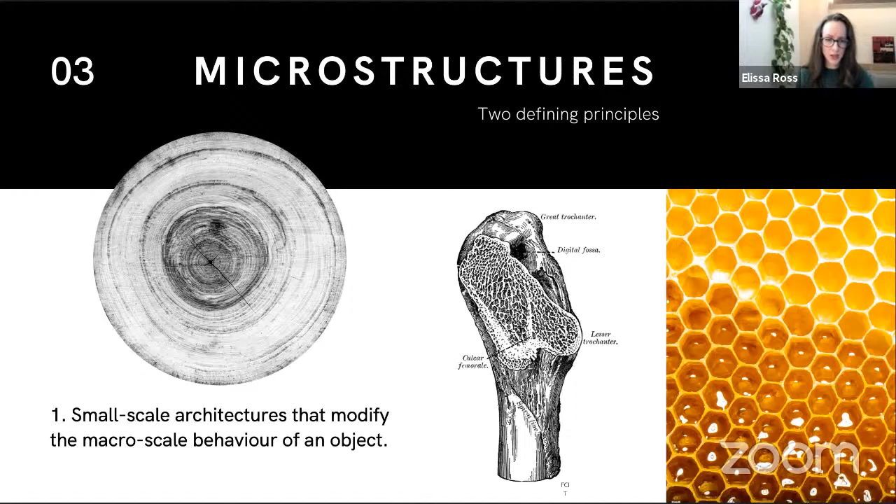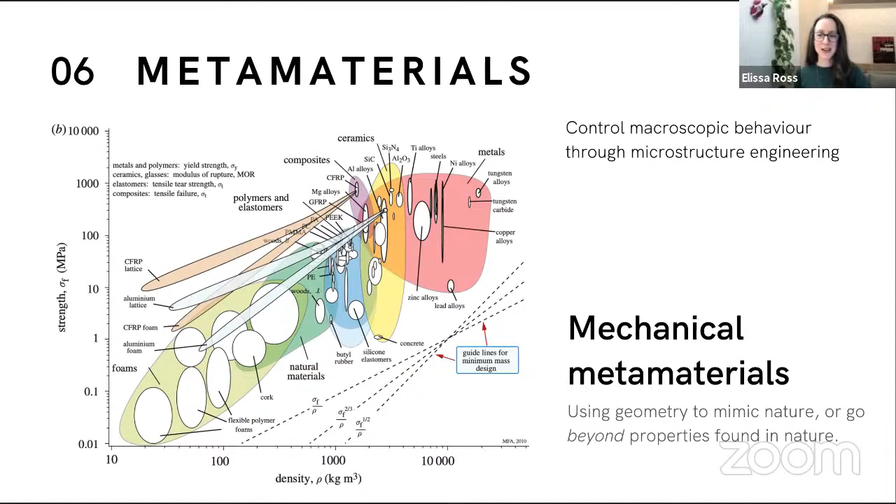That's really the idea of metamaterials, that we're using geometry - in this case, mechanical metamaterials - to mimic nature, or in many cases, go beyond properties found in nature. There are many remarkable examples of these types of materials.

Finally, we can also achieve things like these ultralight metallic lattices. So these are all examples of metamaterials, of materials that end up having properties that are really not found in nature.

There are many different forms of microstructures and metamaterials. Just to provide a bit of a taxonomy, there are maybe three categories I'll highlight: cellular or random structures - these would be open and closed cell foams, but also any kind of stochastically generated material. Then many of us are probably used to thinking about these slender beam architectures as lattices - this is sort of what I think of as a lattice.

But also recently, there's been a lot of interest in these smooth topologies, things like a triply periodic minimal surface, or even not minimal, just a level surface, or other kinds of surface or plate-based lattices. For the purposes of the rest of the talk, I'll be thinking about all of these things as lattices, as metamaterials, and as microstructures.

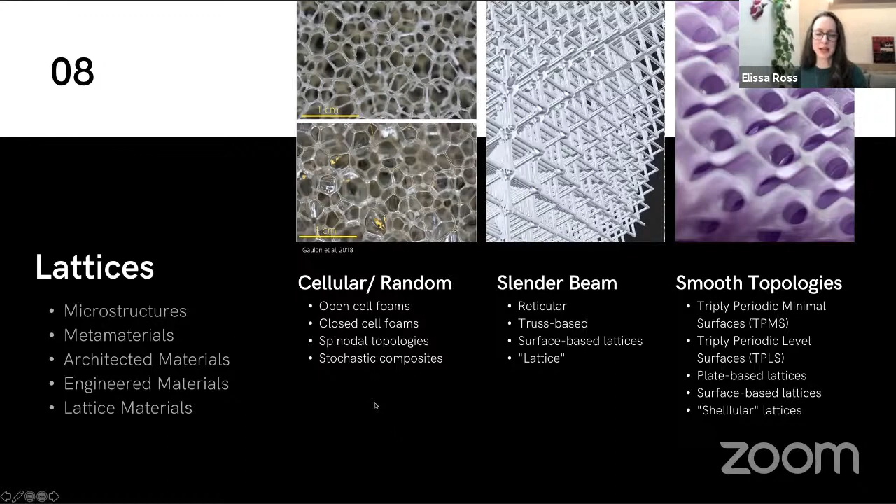This brings me to additive manufacturing, and I thought it was funny - when I went to propose my title for this talk, I first went to see if Jonàs had given his title, and indeed he had, and he had chosen 'Metamaterials for Additive Manufacturing,' which I was amused to see because the title I had selected was 'Additive Manufacturing for Metamaterials.' So I actually tacked on something about an industrial context just to differentiate.

But the point is that this highlights something I want to think about a little bit, and I'm going to call it the metamaterials paradox, which is that additive manufacturing, the existence of additive manufacturing, has really pushed forward the study of metamaterials.

And the work of Jonàs is an example of this, and there are many people doing amazing research in this field. But on the other hand, additive manufacturing has not really realized the promise of metamaterial production at scale. So many of these developments that are so remarkable and happening in the academic realm, it's hard to scale them up to a place where they would be relevant in industrial context.

And there's lots of reasons for this. First is that these can be very complex forms, possibly with very intricate detail, and almost always have very high surface area. And another central challenge is just scale, that if using traditional methods, this involves a lot of geometry processing, mesh representation, a huge amount of computation power, and there's some computational bottlenecks involved.

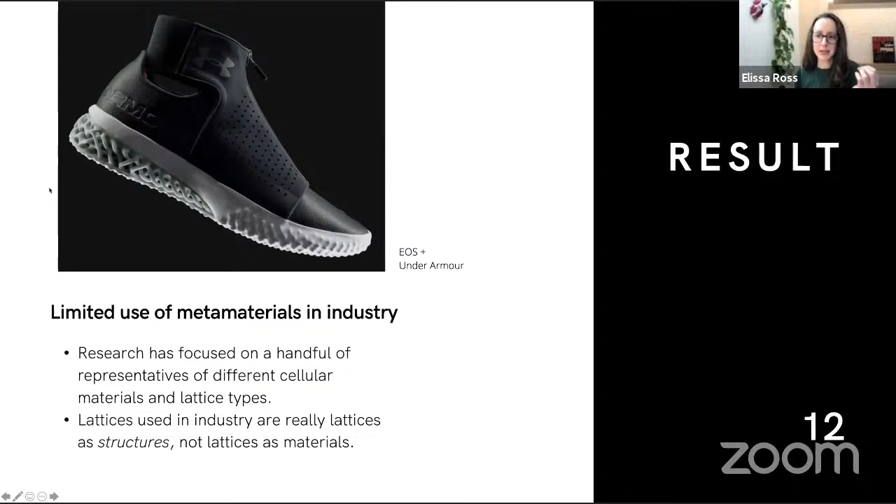And I don't mean to diminish these efforts, because I think they're really important and really cool and they have their own value. But the point that I want to make is that this isn't really metamaterials or microstructures in the way that I've defined it. So in other words, the lattices that are used in industry are really lattices as structures, not lattices as materials.

Which brings me to Metafold. And we are trying to address this issue by creating new software and hardware intended to print lattice materials. So we're really trying to realize that length scale separation.

We printed it at a very fine scale, and we're able to achieve this very unusual optical effect, which is that the gyroid actually seems like a solid. It feels like a solid mass, almost like a material, but then it has this optical property, which is very curious. It's almost invisible in certain light conditions.

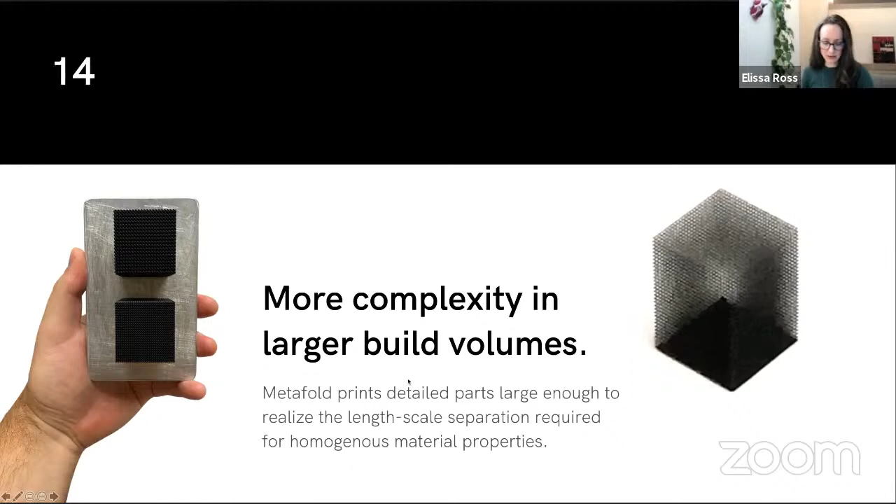In terms of our technical approach, I won't really say too much about this here. It's a DLP-based printer - this means that we're using light to cure liquid resin. But the critical thing is that we've developed both software and hardware that interface together that allow us to print higher complexity and larger forms than other methodologies.

And the kind of idea is that we only generate the geometry that we need at print time. We don't need to pre-compute the kind of closed form geometry all at once in advance and then do some computation on it. We just compute what we need at print time, and it's this feedback, this closed loop between the software and the hardware that allows us to print higher complexity and larger forms.

In terms of our development status, we built our first prototype about a year ago now. That was intended to prove out our complexity hypothesis. And we actually formally launched the company a few months ago after submitting some patent applications. And now we're working to prove out the scale hypothesis, which is that we can scale this up in a very dramatic way.

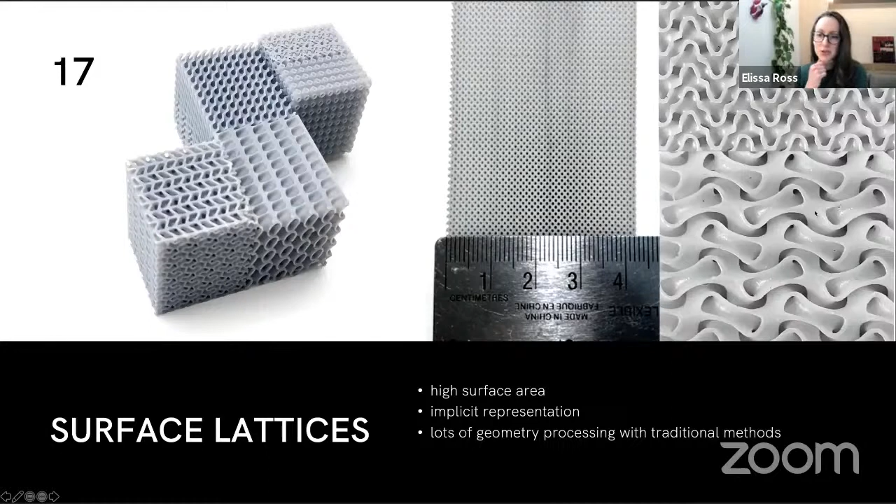So we've been able to print some more unusual surface lattices that we're not often seeing in the research.

We have been exploring and having fun printing these hierarchical lattices. These, again, have really interesting structural properties - they can be very light, yet very rigid because of the interplay between the macro and micro lattice. And these are very difficult to generate in standard CAD tools, which is why it's great that we've been able to just print them using our tool. And they have, again, very high surface area, which is what makes them very challenging.

We have done some work printing more stochastically generated things. This was a nice paper out of ETH, where the authors developed an inverse machine learning model. It takes in a stiffness matrix of your desired performance characteristics, and then outputs the design parameters that provide a geometric prescription to achieve that particular response.

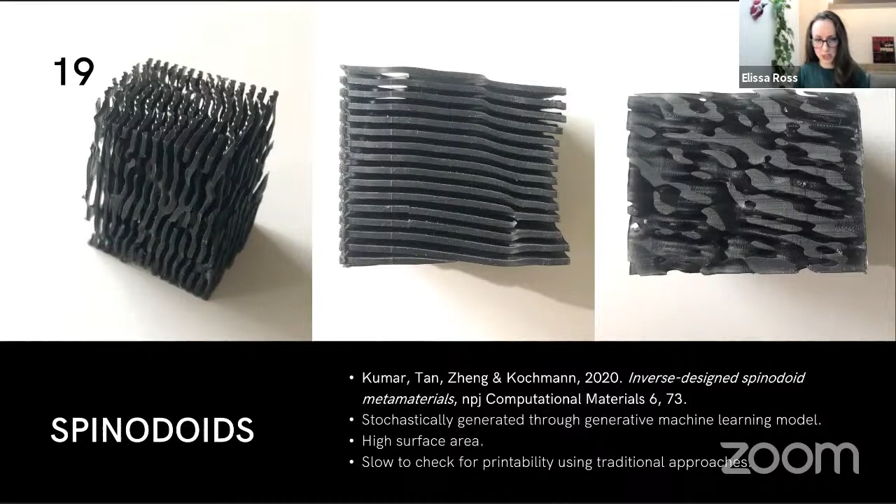These forms would be challenging in standard workflows because they're implicitly defined. We were able to effectively implement the algorithm that the authors defined for their generation, and we can just directly print them.

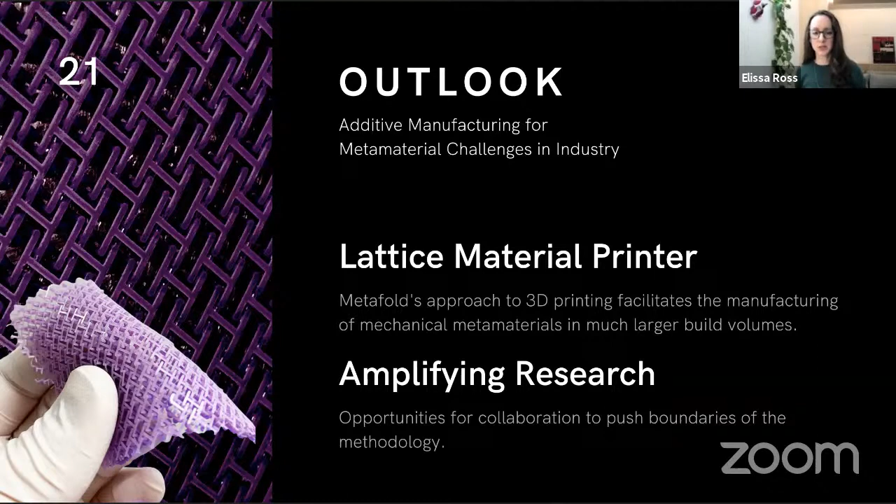So to conclude, additive manufacturing for metamaterial challenges: we're really excited about the idea of creating a real option for a printer that will print lattice materials, not just lattice structures. We're also excited about amplifying and bridging the amazing research being done on metamaterials and microstructures, and translating that into industrial contexts.

And of course, it's very much a team effort. I should say also that Metafold is a spin-off of Mesh Consultants, which is a Toronto-based geometry consultancy. And that's where I'll leave it.

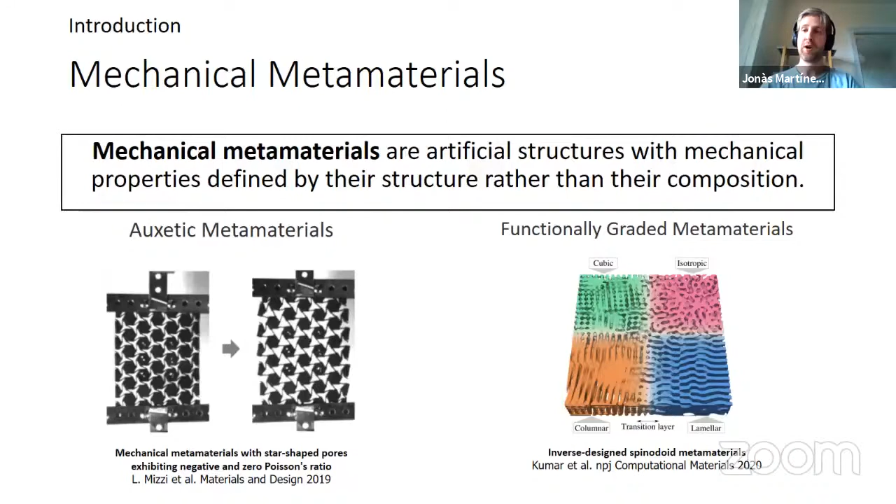So again, this is a kind of repetition, with different applications. One of the most well-known is auxetic metamaterials, for instance designing materials that expand when you do tensile stretching, which is counterintuitive. I also had a look at this recent paper, which is very nice, on functionally graded materials using spinodoid metamaterials. Here you have an example of a stochastic material where you have different types of material properties. This is actually one of the parts we're most interested in: creating metamaterials that exhibit a wide range of properties while being able to print them.

This is another application that we've played with lately, and this is actually a publication of ours in collaboration with scientists in soft robotics. Here, metamaterials can be interesting, for instance, to obtain deformations of a robot that are more interesting than the ones that you get with traditional materials.

This is one application among a lot, because there's a plethora of them. But for instance, you can also do other things with metamaterials, such as shape morphing metamaterials that exhibit some interesting behaviors when you compress them, and so on.

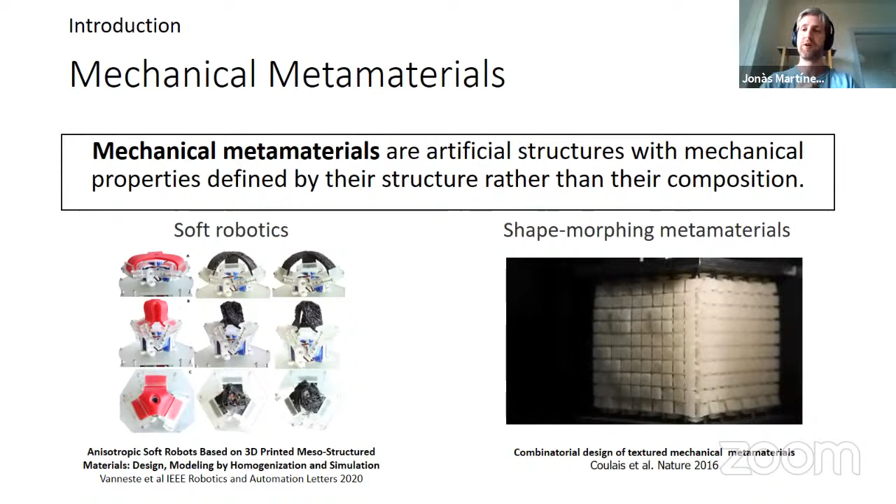So as you can see, there's a lot of possibilities, a lot of fields of application where metamaterials show great promise. This is in particular because currently with additive manufacturing we can manufacture such structures, at least in the mesoscale. Here you have an example of one of the structures that's been printed with a regular Ultimaker using fused filament fabrication.

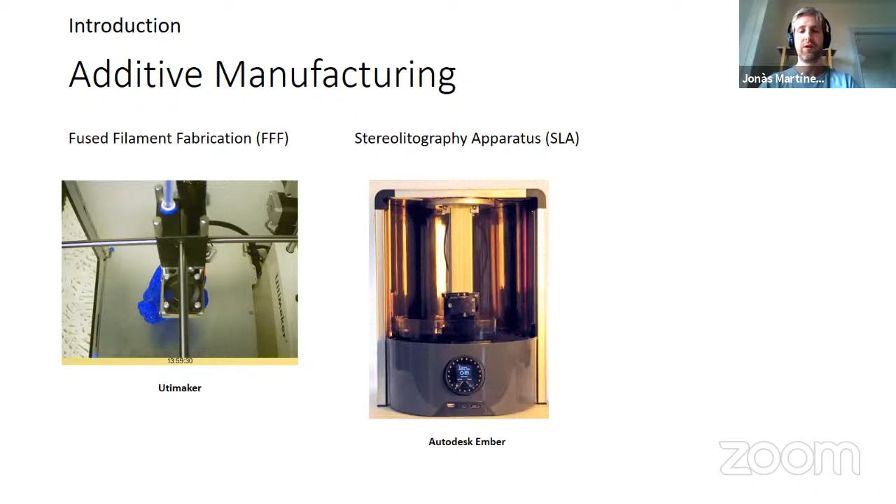But of course there are other technologies available, such as stereolithography apparatus, which proceeds layer by layer through solidification, or for instance selective laser sintering.

I want to show these different techniques because when we are dealing with metamaterials, we should never forget that at the end they are going to be printed, and this means that we have to take into account the fabrication constraints that they impose.

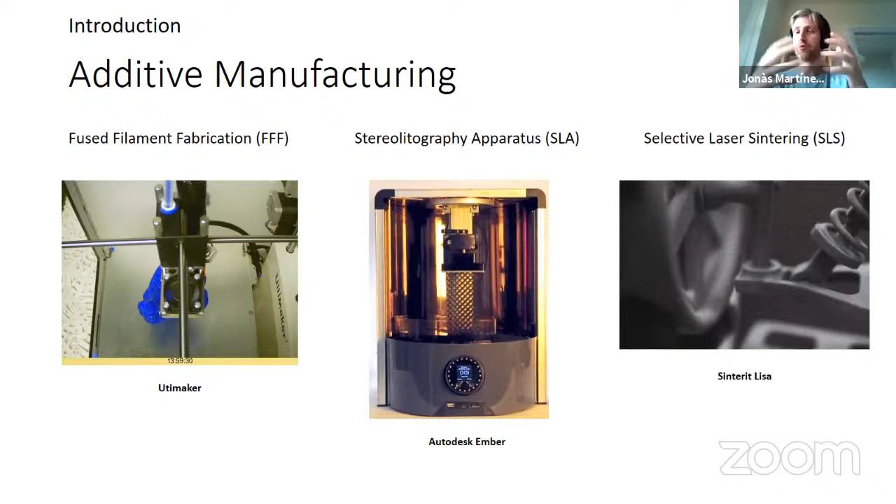For instance, for fused filament fabrication, you need things that are self-supported, because due to gravity they will fall unless you put supports. For stereolithography apparatus, you need structures that are single connected components, and so on. So you have to take these into account when you design your metamaterials.

So there are two different classes of metamaterials. I'm going to focus on the two that are most widespread. The first one, one of the most used, is periodic metamaterials, which are defined basically by a representative volume element, usually a cubical periodic element that is repeated through space.

The advantage is that they can be very efficiently simulated, and the storage is very compact. So you can simulate with periodic homogenization, as Elissa mentioned, the behavior of this kind of microstructure in the limit.

But on the other side, there are some challenges being tackled by researchers now, which is when you have different families of periodic metamaterials that exhibit different topologies, and you want to do a continuous gradation between them, you have to take into account the transition between them.

This is a bit of a repetition, but I'm going to briefly pass on this. So what is periodic homogenization? Basically, you consider that you have a representative volume element that characterizes your microstructure.

And then you consider that the size of this representative volume element goes towards zero, and then you consider the homogeneous material that you will get, and you get the average properties of this material. There are several numerical tools to do that.

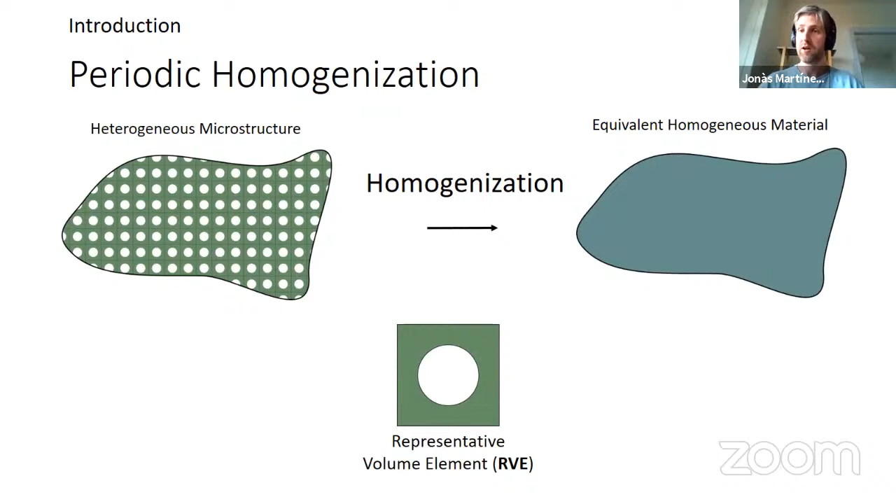One of the cons of stochastic metamaterials compared to periodic ones is that, for instance, the homogenization becomes more costly. I will explain that later, it's more involved. But one of the big advantages is that you can do grading in an implicit way.

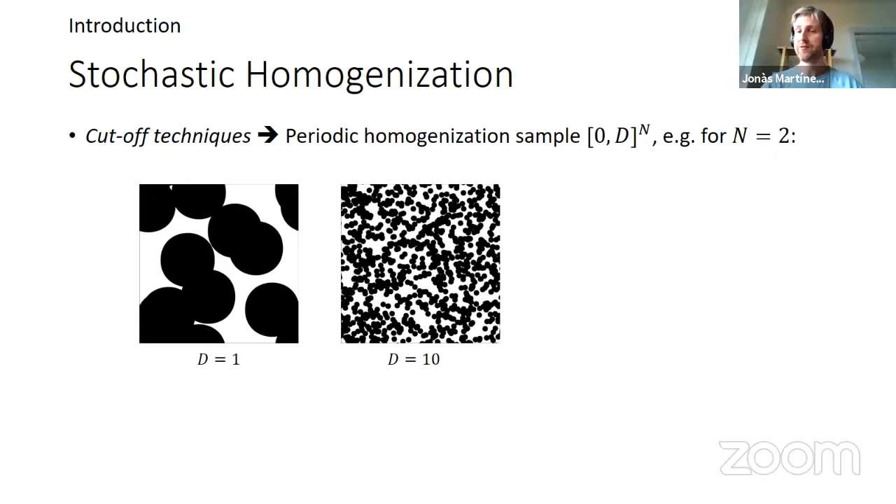So how do we compute the average behavior of a stochastic material? That's actually a pretty involved question. Usually what we consider is the so-called cut-off techniques, where we take basically a representative sample of our random media, and then we try to find what is the size that gives us a good approximation. Here you can see basically these are points randomly sampled on a space.

The interesting thing is that actually it's been proved that when the size of this cut goes to infinity, it converges to a stable behavior.

Coming from computer graphics, initially we draw our inspiration from something that was really old, which is procedural solids. You can see here an example from SIGGRAPH in 1989, hypertexture. What's going on is basically that you have a procedural definition of your solid. So basically, for each point in space, you have some lines of code that are going to tell you if it's either solid or it's empty. It's as simple as that.

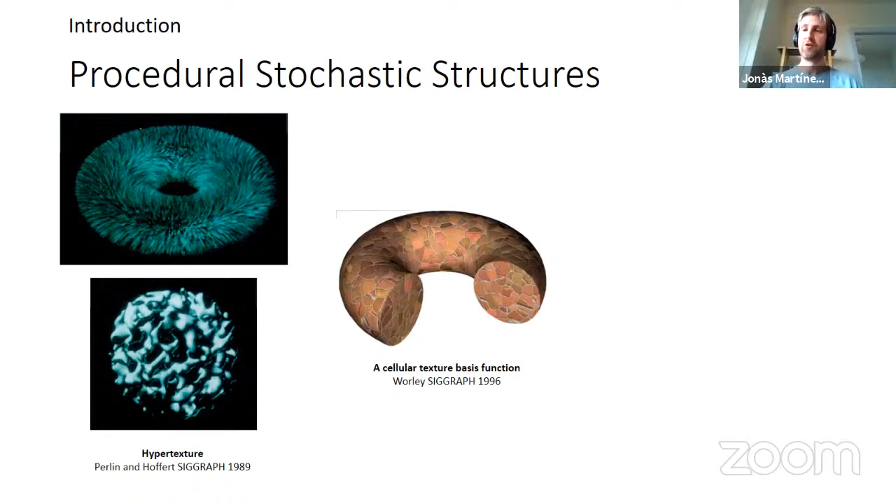As you can see, it's very compact. It doesn't involve having a mesh, and it's amenable to scale with microstructures and fabrication. Here you have another example, and if you want to have a look, you can find a lot of them on Shader Toy, procedural solids.

So here's the pipeline that we will follow in all the next results I'm going to show. Just to recall from the beginning: we have some object that we're going to fill with a microstructure in the interior. And then at some point we want to print the slice. So what we're going to do is call our procedural code to fill the interior of this slice with a microstructure.

Basically, we never generate meshes in our approaches. People keep asking us for a mesh, but it's difficult for us to provide them because we don't generate the mesh — we generate directly the instructions for printing. It can be in the form of G-code or, for instance, an image for stereolithography, but we never explicitly store a mesh.

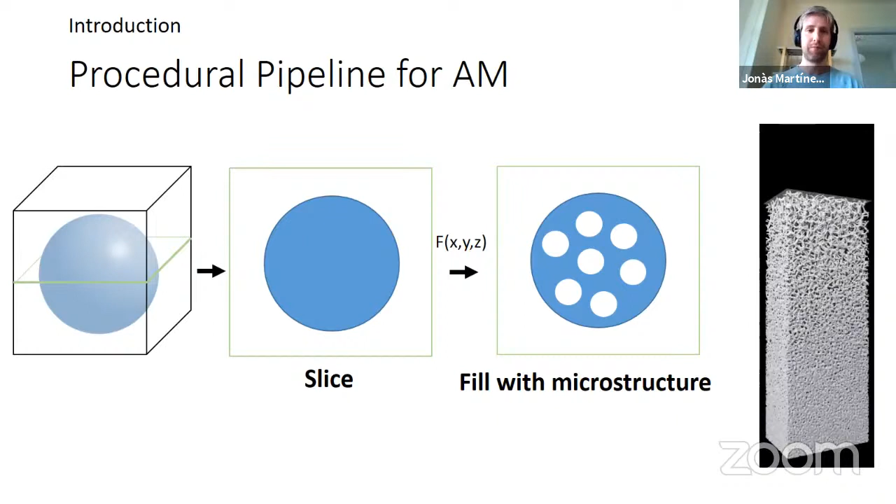Before continuing with my presentation, I'm going to give a brief explanation of two types of elasticity that we consider. The first one is isotropic elasticity — this is the most simple. Imagine that you have some body, and then you apply some force over it.

And the force is applied to some area A, so we call the stress the force divided by the area. Then, of course, this force is going to cause some deformation, and the ratio of this deformation and the total length is called strain. This is a relative measure. We denote by Young's modulus the ratio between the stress and the strain.

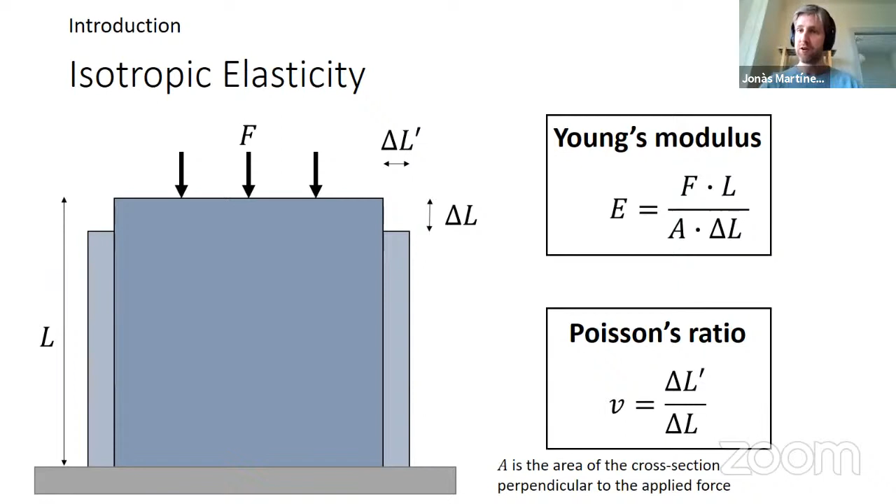This is given by this formula, and the Poisson's ratio is the ratio between the lateral strain and the vertical one, so it's a dimensionless number. An isotropic material is one that is entirely defined by these two constants. Intuitively speaking, this means that regardless of where you do the compression or extension to your material, it's characterized by these two numbers.

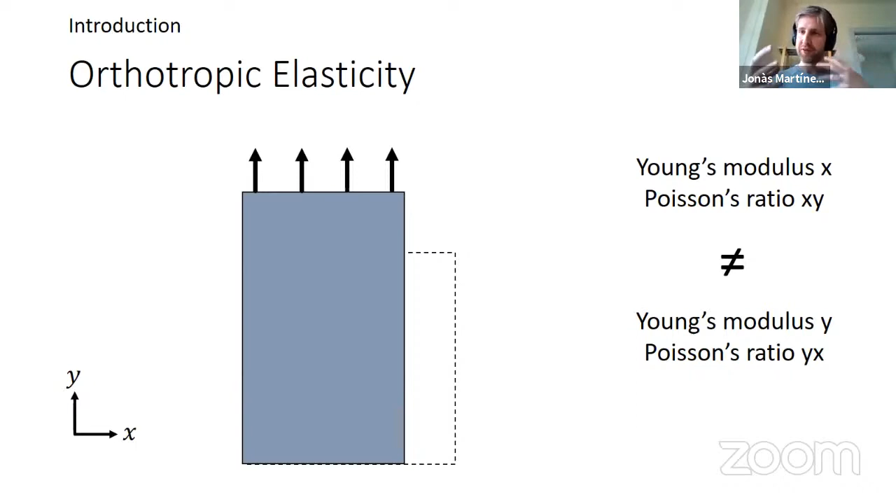Another kind of materials that we consider are orthotropic ones. These are defined by more variables — I'm going to give a very brief explanation. Basically, we have an orthogonal frame, XY here. If we apply a force in one direction, we get some Young's modulus and Poisson's ratio. If we apply the same force in another direction, we get a different Young's modulus and a different Poisson's ratio. So basically, these are materials that have independent orthogonal Young's modulus, Poisson's ratio, and shear modulus, which I won't go into detail on, but gives a notion of what an orthotropic material means.

Because we never try to forget that at the end we want to print that, we have to take into account these fabrication constraints. So let's dive first into the first work. What we wanted to do is basically an isotropic material that we could print with an Autodesk Ember, which is this kind of stereolithography machine.

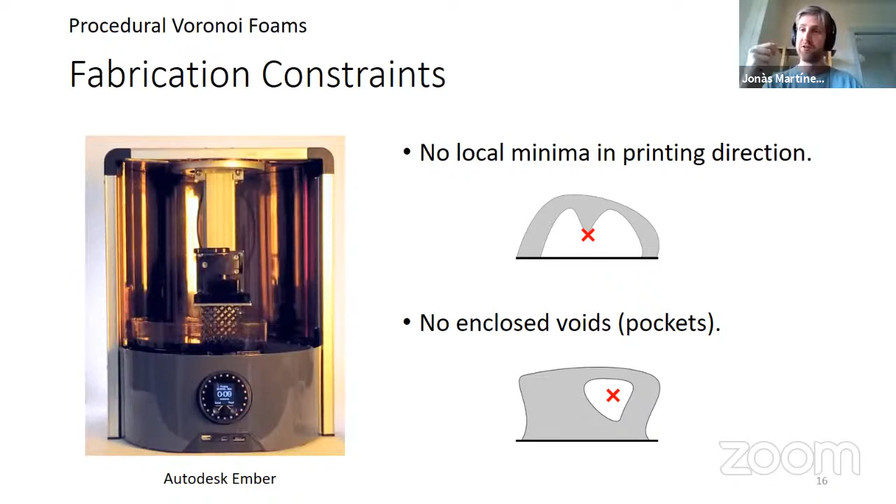The fabrication constraints here are basically that you need to have no local minima in the printing direction, so basically you cannot have this kind of islands. Also, you cannot have enclosed voids because they will trap the resin in the interior, and that's something you want to avoid.

So we figured out that having convex cells, a cellular structure with convex cells, is good because you guarantee that you don't have local minima. And in particular, an open cell structure doesn't have enclosed voids. So just taking the edges of a 3D Voronoi diagram seemed promising.

We dived a little bit more, and we saw that there were already several studies on Voronoi microstructures. It's interesting because when you consider a small piece of the space, it's been shown that the randomness helps to get a better isotropy for a finite extent. Also, we got interested because the Young modulus is correlated directly with the relative volume. However, the Poisson's ratio remains quite stable and positive.

So how do we compute this in a procedural fashion? Basically, we have some input density field given by the user that indicates some density distribution of the seeds. And then you have some point Q, and you want to determine whether it's solid or void.

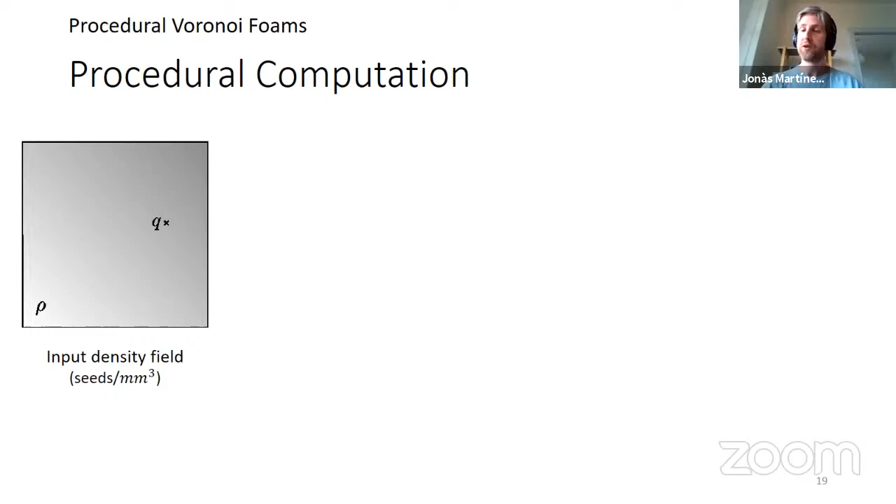So what we do is recursive gathering of seeds around this point, the seeds of the Voronoi diagram. And we compute some local bisectors, like the local one on the point Q. And then we can determine if the point belongs to a Voronoi edge or not. We do that without ever explicitly storing the seeds or any mesh. It comes in a procedural form.

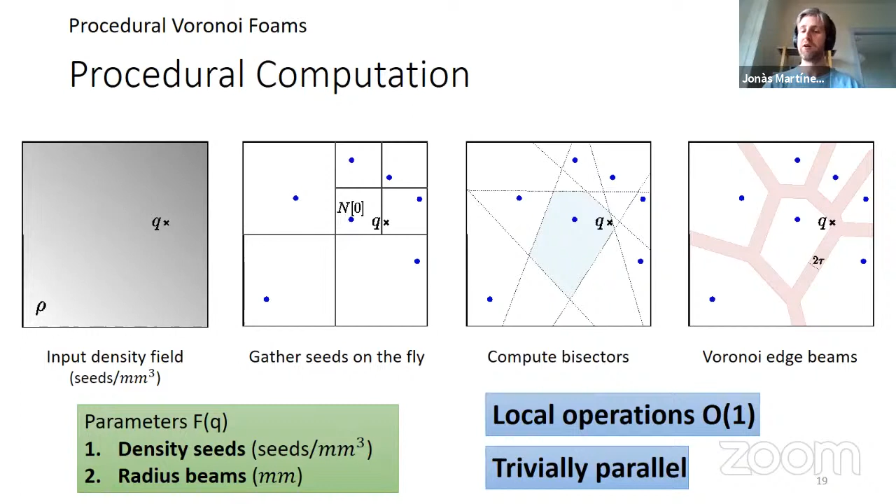So basically we have two parameters: the first is the density of the seeds, and the second is the radius of the beams. And all these operations are trivially parallel and run in constant time. You can find 2D implementations of these already in Shadertoy. However, the 3D case was not straightforward, and we had to deal with some more complex cases, but there are also implementations available.

And finally, we also did some numerical homogenization to verify that our results corresponded to what's known in the literature. So regarding the Young modulus, as you can see here, you have the volume and the Young modulus. It correlates in a quasi-quadratic fashion, so you can encode this even with some polynomial formula.

And the Poisson's ratio, for instance here the base Poisson ratio was 0.3. As you can see, it stays pretty stable around 0.3 and goes up to the limit of 0.5 for very low densities.

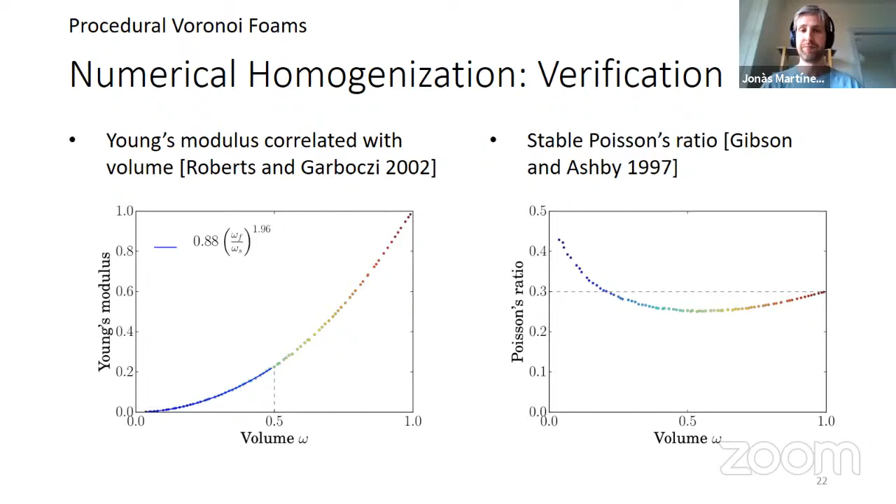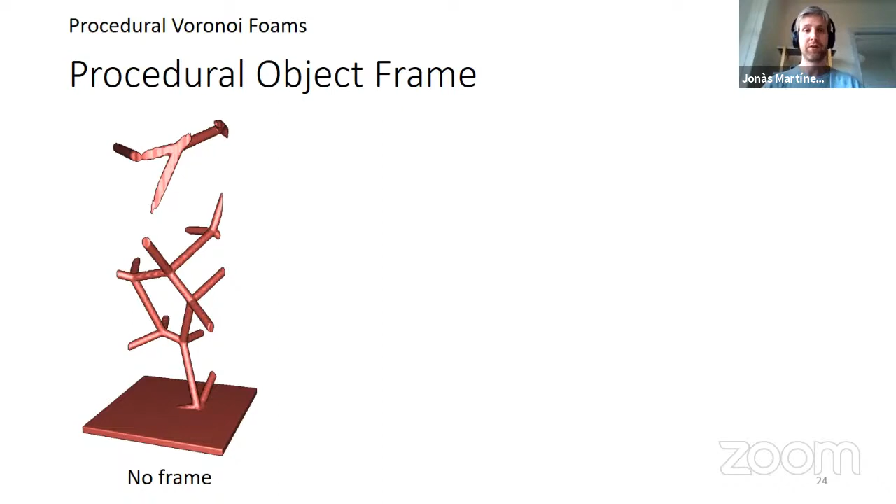Finally, something that we do also in most of the works based on cellular materials is a nice trick: we can do a procedural frame as well. So if we consider the intersection with the Voronoi faces, we get this - this is a cylinder. And if we improve it, taking into account the normal, we can smooth it and get an even better approach. So we can do the frame of the structure also in a procedural fashion.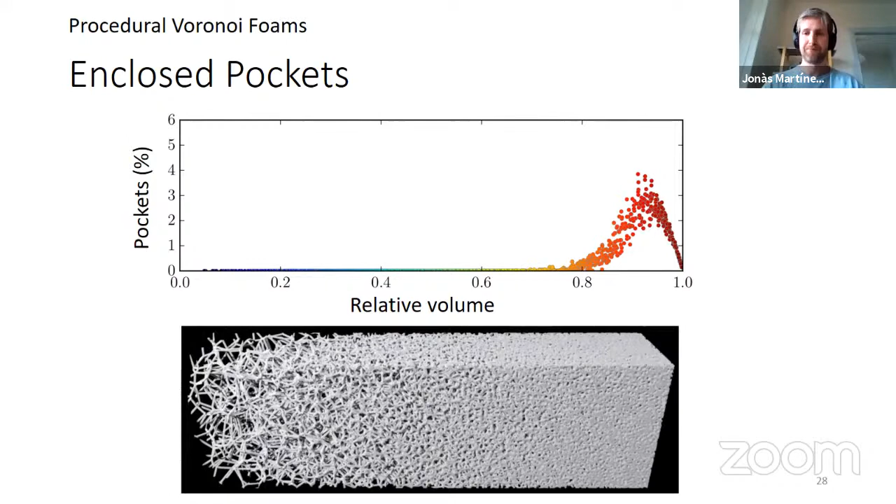So now let's go for the second class of metamaterials that we developed. In this one, we wanted to do an orthotropic material. This resembles a little bit the slide from Elissa showing the wood, because what we wanted to do is a material where we can change locally the local frame of orthotropy - basically something where we can define how stiff it is in one direction and how stiff in the other orthogonal direction.

This is because, of course, if you enlarge the space of materials, you can adapt directionally to the loading scenarios, and you can devise better designs.

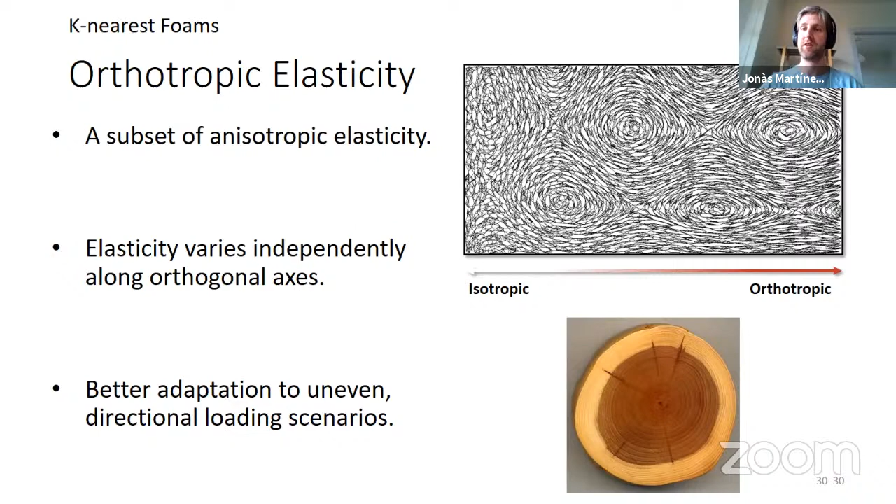So our first try was to take the Voronoi diagrams and just stretch it. If you do that, that's actually okay, but of course this is quite difficult to compute when you lift to 3D dimensions, because either you do an inverse mapping or you compute Voronoi anisotropic diagrams, which are difficult to compute procedurally.

Then we thought about doing an anisotropic point sampling, but actually it doesn't induce any orthotropy. We even tried to vary the Voronoi edges following some direction, but it didn't work.

So we wanted to take another approach, and we thought about getting inspiration from this kind of laminate-like materials. I'm going to show you truss materials that follow a laminate structure.

What we did is consider basically a k-nearest graph of a set of points. Basically, you have an input point distribution, and your k-nearest graph, for each point, you're going to link it to the k-nearest closest points. For instance, you can have k equals 6, and you link it to the 6 nearest points. You can do that considering some metric.

In our case, we consider a distorted metric, basically the Euclidean one with some affine deformation. As you can see, we have two parameters: one is the angle of this metric, and the other is the stretching factor. Finally, we also have the beam thickness parameter.

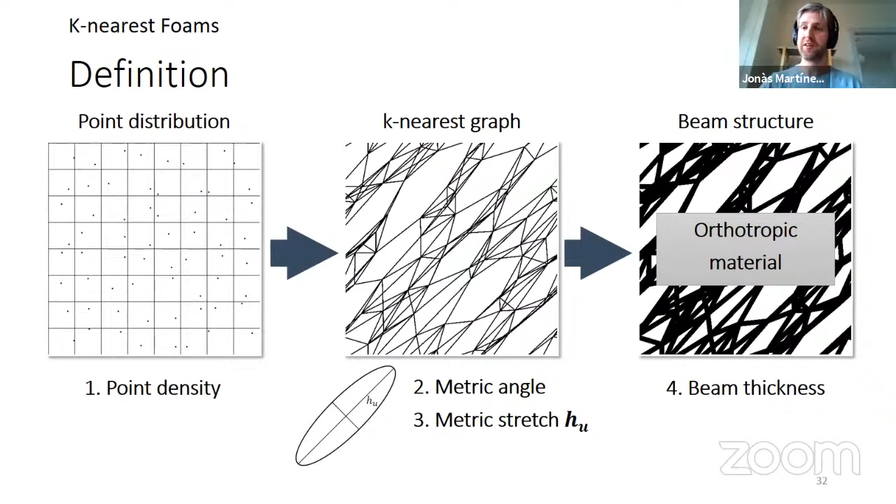And we found that this gives actually an orthotropic material that spans a pretty wide space. I'm going to enter in more details about that later.

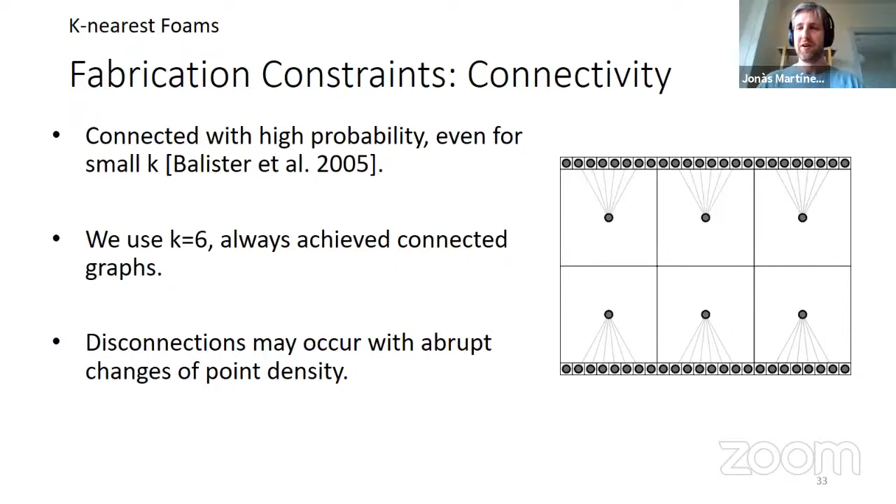That's interesting. There's been a lot of studies on what is the number K that guarantees almost that your network is connected, because of course if K is very small, you can have networks that are non-connected. So for K greater than 6 or 7, it's been proved that it's almost impossible to have a disconnected network. But I can show you a counterexample, nicely fabricated, where you get a disconnection. This is highly unlikely, and we never encountered it.

Another thing that is nice from k-nearest graphs is that they are amenable for procedural computation. This means that we can take a window on the space and do an independent evaluation of this window in parallel, without having to evaluate the whole thing or generate a mesh, etc.

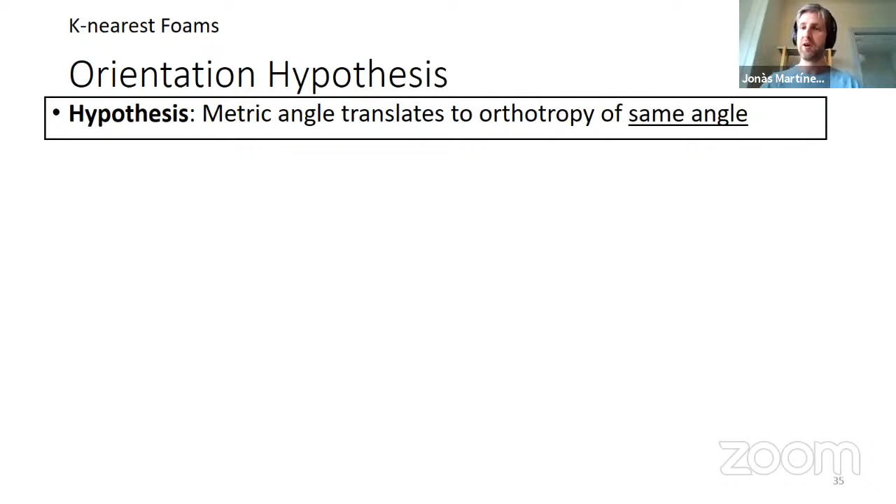Here I'm going to show you the material space in 2D. In 2D, we span a quite wide space of Young's moduli, almost reaching the complete square, which would be the optimal bounds achieved by laminates. We achieve something pretty close. Here you can see some samples of this space.

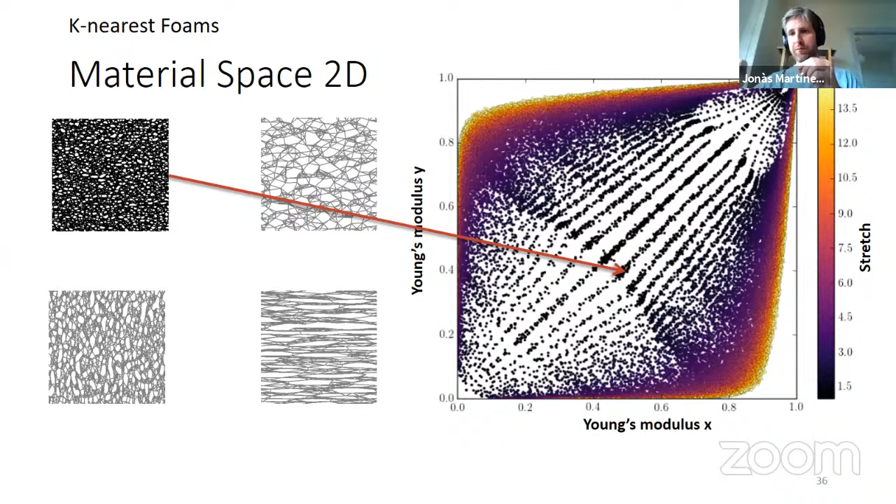So basically here what you can see is the Young's moduli in one direction and the Young's moduli in the other direction. And the color is correlated with the stretching factor of your metric. So the more you stretch your metric, the more extreme the contrast gets between one direction and the other.

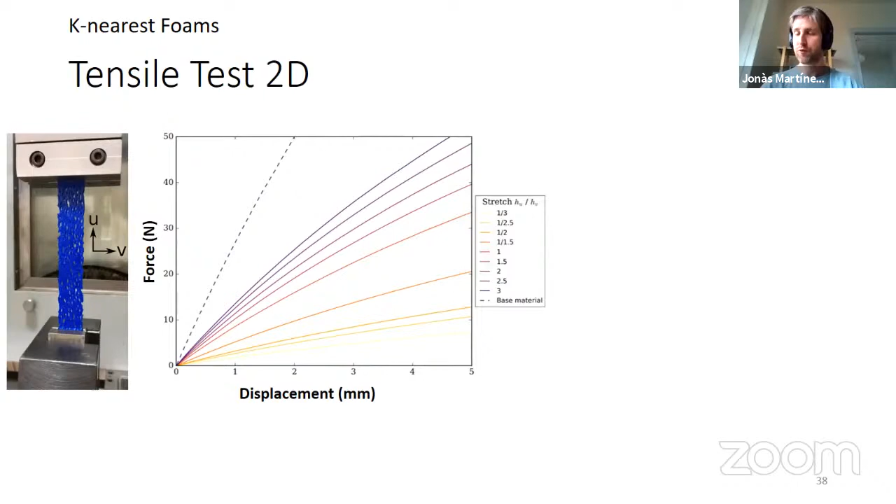We also did some compression tests in 3D, and we also saw some close agreement. So this is just to validate it.

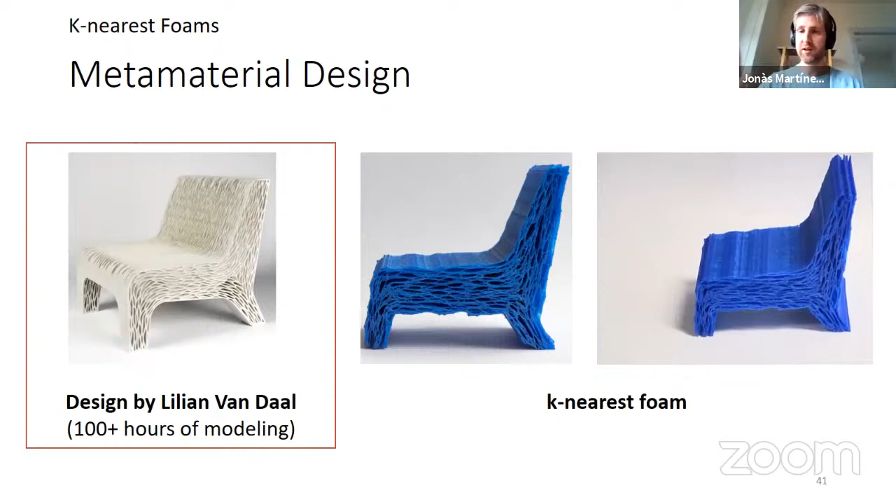Here are some possible applications of our approach. The design on the left was done by a designer, and this was actually one of the inspirations for this work at the beginning. It took him more than 100 hours of modeling. On the contrary, with our foam, just by rapidly aligning the fibers, we can get similar results.

We can also get interesting results due to the fiber alignment. Here you can see cylinders with different properties depending on where you compress them. And of course, you can also envision using these materials to increase resistance by aligning the fibers to the direction of pressure, and so on.

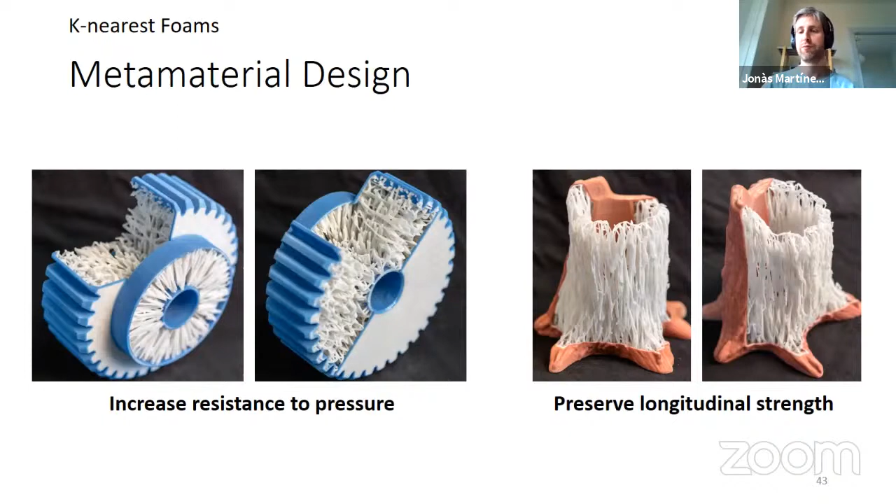So finally, I'm going to show you the last work in this line of research on procedural foams. This work was also about a family of orthotropic materials, but it had a difference from the previous ones: we wanted to do something for fused filament fabrication printers. Basically, the printers that common people have at home that cost 200 to 300 euros, and where the prints are also very inexpensive to do.

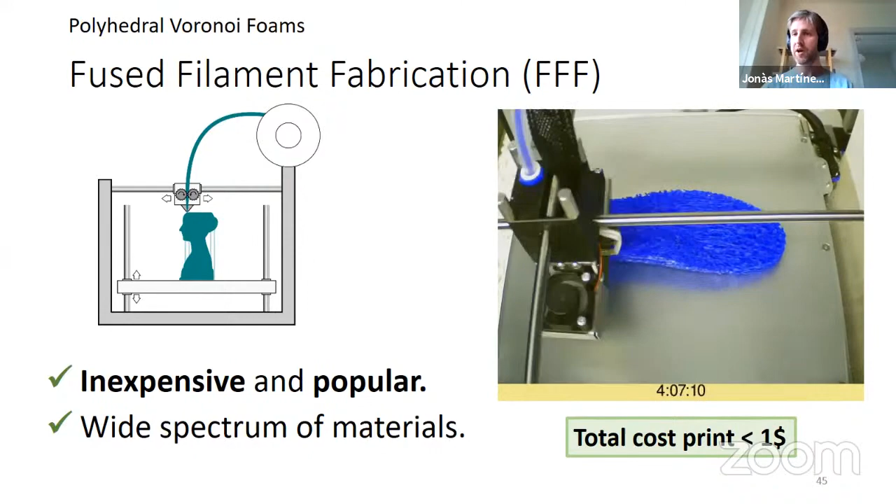It's a very nice fabrication method because it's inexpensive, but on the contrary, it imposes constraints on the fabrication that are pretty strict. The first one is, again, the no-local-minimum constraint. You cannot deposit filament anywhere; there's some overhang angle that you need, and typically this overhang angle is bounded. So basically, if you exceed more than some angle, it will fall apart. So there's an angle of security, let's say, where you can place the filament such that it remains self-supported.

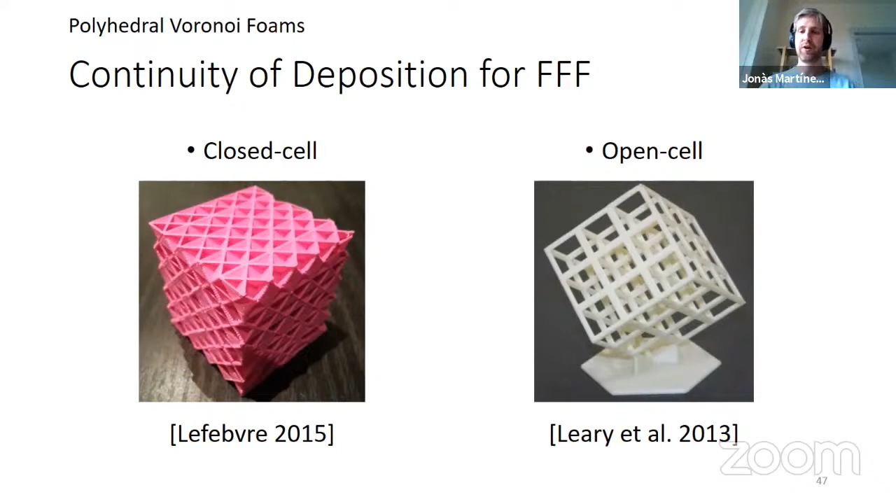So there's been some work on doing structures for fused filament fabrication. Some of them are closed cell, others are open cell. We favor using closed cell mostly because when you do the deposition, you can get a continuous path. With open cell, you have to jump from one to another, which will probably pollute the print a lot.

Regarding closed cells for fused filament fabrication, there was already previous work on some families, but what they had in common is that they span a small range of elastic behaviors, because they were just a single family. We wanted to have a wider parametric family.

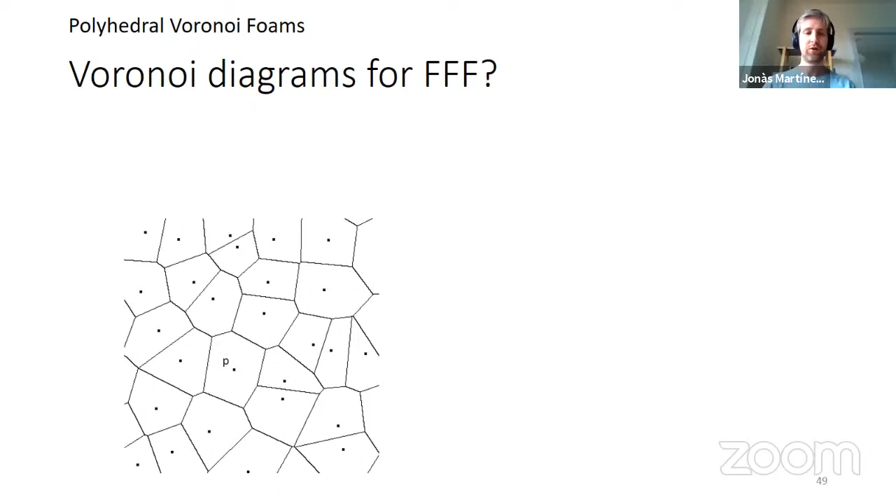So our first idea was: can we do a Voronoi diagram that we can print with a fused filament fabrication printing device? The answer, when you take the regular Voronoi diagram, is no, because if this is the printing direction, you have edges that violate the overhang constraint. Imagine this is just a section—you have some faces that are going to fall. So it's hopeless; it's probably going to be a bad experience and not go well.

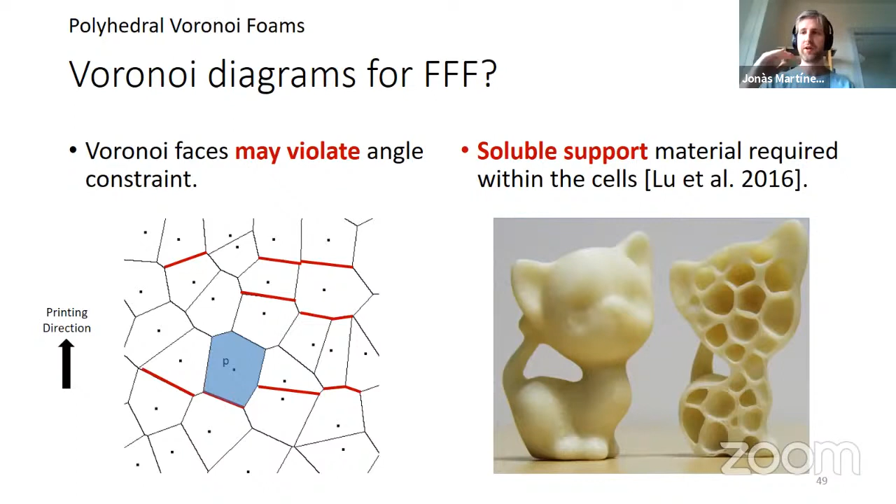There are some solutions, for instance putting soluble supports, but we wanted to avoid that. We wanted basically to print something that was self-supporting and not require anything after printing. So we came to the following idea.

We noted that with Euclidean distance, we had these angles violating the constraint. This is because when you look at the bisectors—the surfaces that bisect, taking 2 points, the bisector being the set of points at equal distance from the 2 points—if you move any 2 points in the space, your bisector can take any angle. That's why there are arbitrary orientations.

But what if we change the distance? You can measure the distance between 2 points using another metric. One possibility is to use a polygonal distance in 2D. And here something interesting happened: you get a finite set of orientations—you can only have 0 degrees, 90 degrees, and 45 degrees. That was interesting, and our intuition was that maybe there exists some distance that will enforce the non-local-minimum and angle constraints.

We saw that when you use this sort of triangular distance, this was enforced, and now I'm going to explain why. The idea behind this project is basically: finding a distance, a set of distances, a family of distances, such that when you do the Voronoi diagram, the resulting diagram strictly enforces the fused filament fabrication constraints.

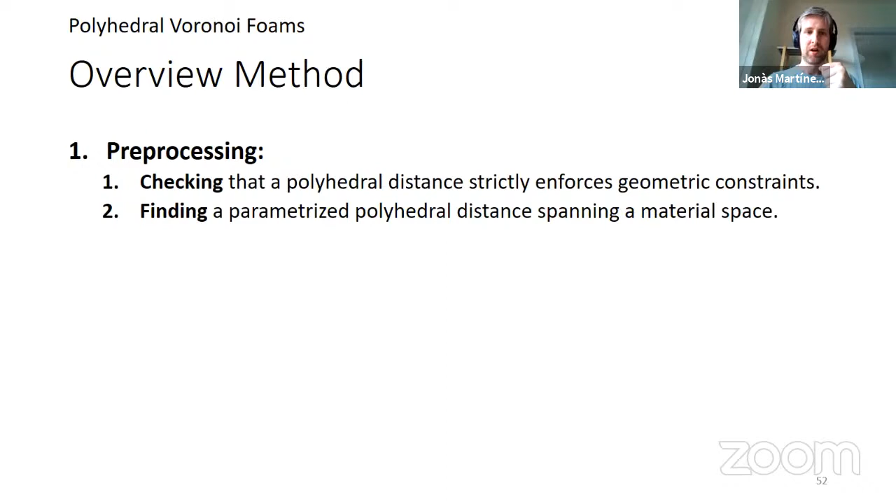So I'll give a brief overview of what a polyhedral distance is. Basically, a distance is something that measures, that gives you a number between 2 points. The polyhedral distance, intuitively speaking, involves centering the origin of your polygon at one point, and the scaling factor is the distance.

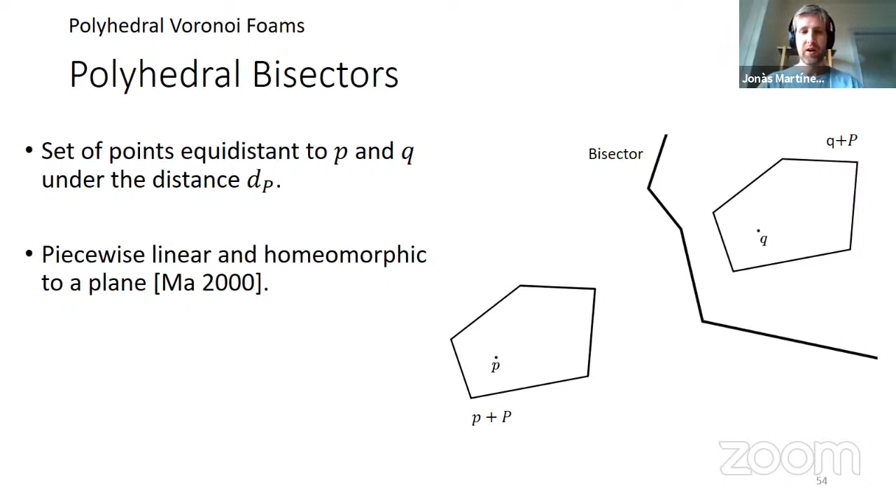So here, if you take this weird distance and compute the bisector, you will get this bisector. And what we know from previous work is that this bisector is actually homeomorphic to a line in 2D, or to a plane in 3D. So that's nice because it completely separates the two points.

What is very nice is that each facet of this bisector is actually defined through the interaction between two facets of your distance set. So here, for instance, you have this piece of a bisector that is defined by two parts.

So what we do basically is we take a distance. We have a method to enumerate all the different angles that can arise, and we have another method to enumerate all the possible configurations of the bisector. In 2D it's very simple, and in 3D there are more cases. But basically, that's the idea behind this project.

Once you have verified that the bisectors are always self-supported, you can also show that the Voronoi diagram is, as a consequence, self-supported and printable.

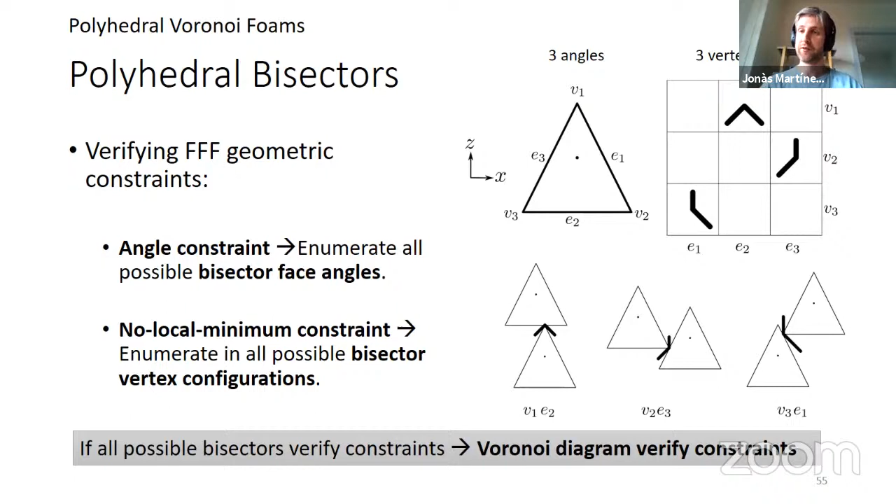So we did a parameterization of this family of distances. How do we do it? Basically, we consider a pyramid going in the printing direction with a base and an apex. The base is parameterized by a regular polygon with K faces. And then we have different parameters that control the origin and the ratio of the lateral side and the distance to the apex.

So basically the aspect ratio. These are the parameters that appear below. And finally, what we can do is we can rotate this cone, of course.

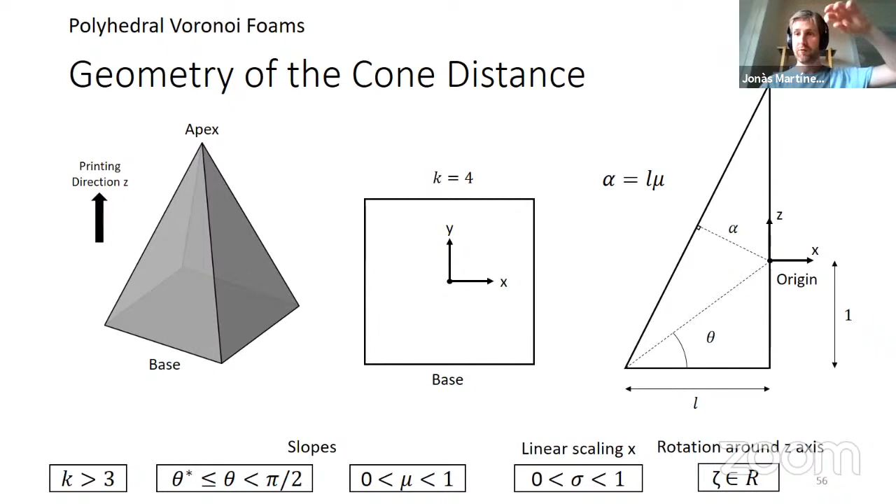So here, let's see a visual explanation. Here, for instance, if the origin in the interior is fairly down, we get a 25 degree overhang angle minimum. Here we get 45 degrees, and here, this one is pretty strict, we get 65 degrees. So that's one possible parameter.

We usually fix it to 45, but the user can choose it. The parameter mu controls basically the aspect ratio. So intuitively speaking, you can get either more vertical faces or less vertical faces from left to right.

The parameter sigma is basically a stretching that we do in one direction. And the more we stretch in one direction, the more the faces, the Voronoi faces, get elongated in that direction. And then we expect to get some anisotropy in that direction.

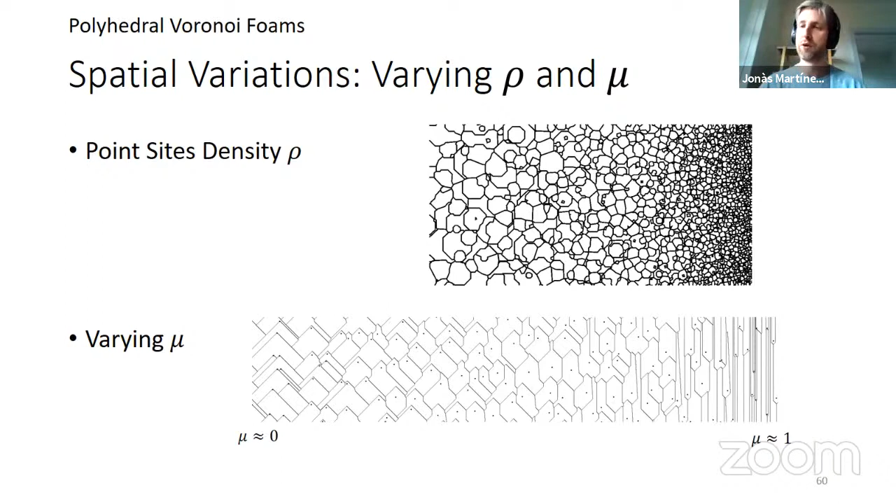And finally, that's the nice thing of procedural foams: you can play intrinsically with the point site density. So that's one slice, and you can also play continuously with these parameters. So here you can see how we continuously grade from mu0 to mu1, which is from no vertical walls to almost all vertical.

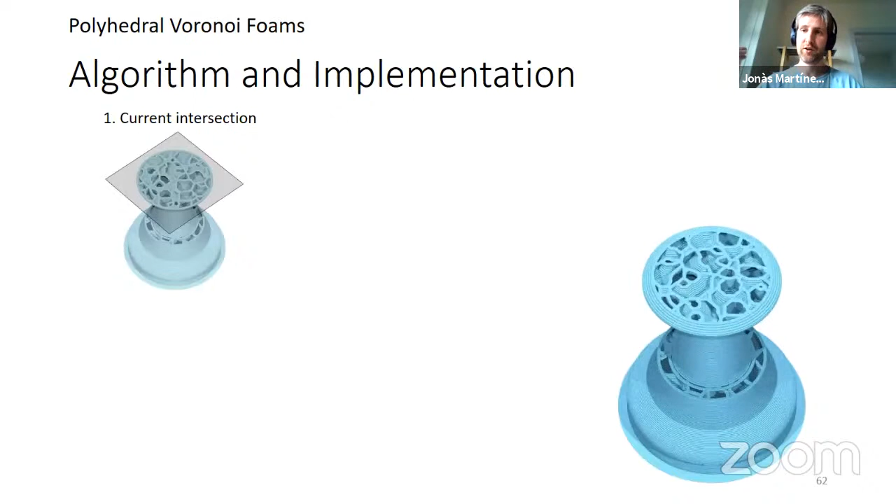And again, we do that in a procedural fashion. This is basically a program that procedurally evaluates for each point which Voronoi cell it belongs to. So we do a procedural labeling and then also a boundary extraction, and we generate directly the G-code, never a mesh.

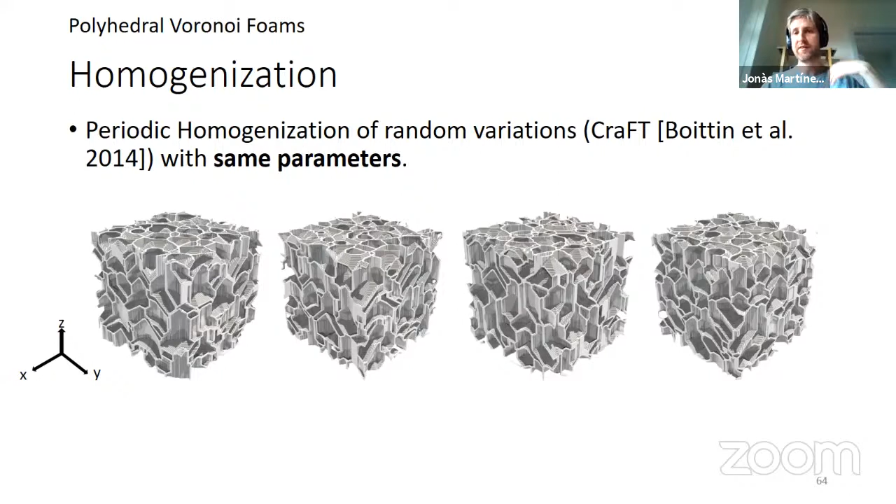And then also we did a correlation of the parameters of this family of distances and the homogenized behavior, the average behavior. So what we did is a pretty standard procedure, which is the CraFT technique, taking different random variations to get the low variance of your homogenized elasticity tensor.

And looking at the data, we see it seemed plausible to consider that our material was well approximated by an orthotropic material, having independent Young's moduli and Poisson's ratios here in the three orthogonal axes.

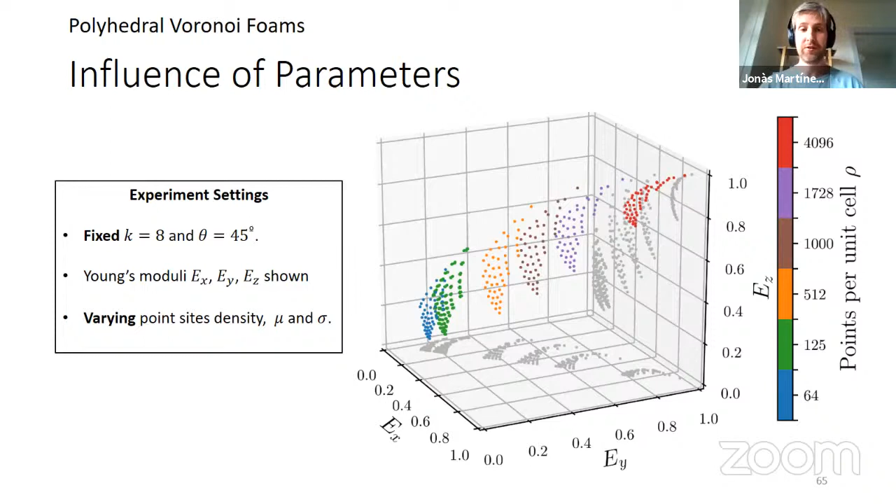So here you can see a plot of the three-dimensional Young's moduli in all the three axes, and you can see that there are different spreading families that correspond to different densities and parameters. So as you can see, we span - I will not say a wide space, but we span a continuous space of behaviors, and we can continuously transition from points in this space.

So basically, that's something interesting. And we see also that there's a strong correlation between the parameters and the elastic behavior.

So here you can see, for instance, the mu is correlated and sigma is correlated with it. And finally, like in the previous work, we did some experimental verification. The results were fairly consistent, but I want to point out that it's actually very complicated to precisely determine the elastic behavior of materials made by fused filament fabrication.

Because there's a lot of factors impacting it, there's also the anisotropy of the layering process. This arises in all manufacturing technologies. So we observed already this anisotropy - we had different measures in the printing direction compared to the other orthogonal ones.

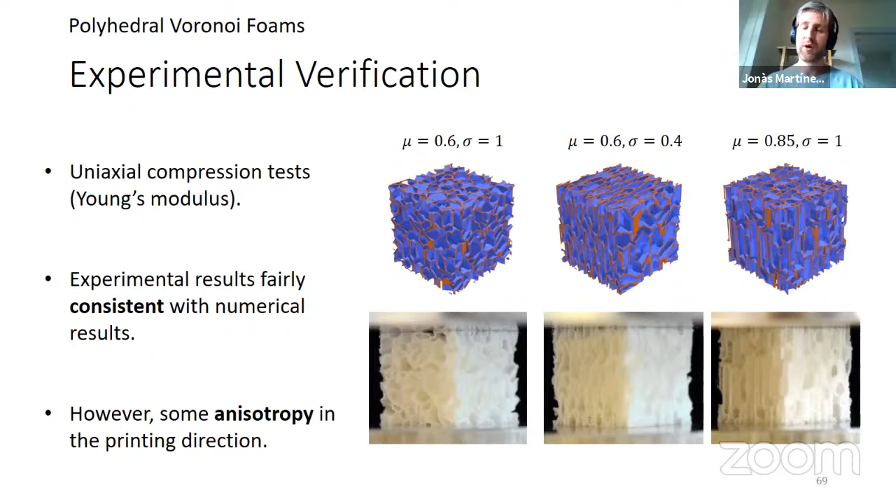On the contrary, they print slower because of the stochastic geometry. And also, if you want to achieve extreme rigidity, usually it's a better option to use non-stochastic, but regular structures that are designed to be very stiff.

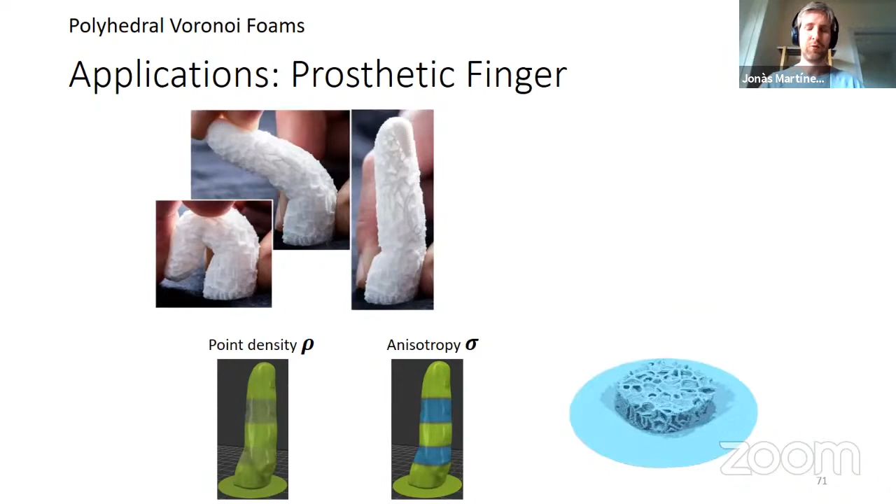So here there's another example. What you can see is basically the rendering of the G-code, not a mesh again. This is the prosthetic finger, similar to the one we did with the Voronoi foams, but this one was more resistant to bending. It was not brittle, finally.

So we have an ongoing work that is studying applications of different metamaterials for orthopedic applications. They are studying several different classes of metamaterials, and one of them is this, just to point out that it has applications.

What you see is basically the printing. So from our experience, it prints very robustly. But what I mean is that basically you do several prints and you always get a hand. So it's not as delicate as other technologies that, from our experience, require more fine-tuning - there's a high probability that something goes wrong during printing and you don't get anything.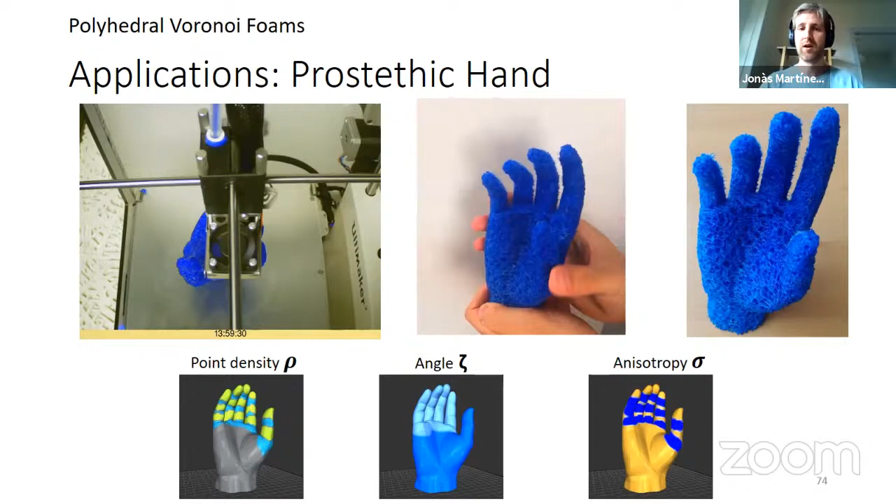And of course, you can put a hand over it - a skin over it.

All right, so you can Google for that on YouTube, and you will see a video with different things we did.

And of course, if you want to try that, we have a software that we develop in the team where we try to push our latest research. It's called IceSL. And here, if you select the polyfoam infill, what basically you're going to use is the infill of this last presentation. And you can play with the different parameters.

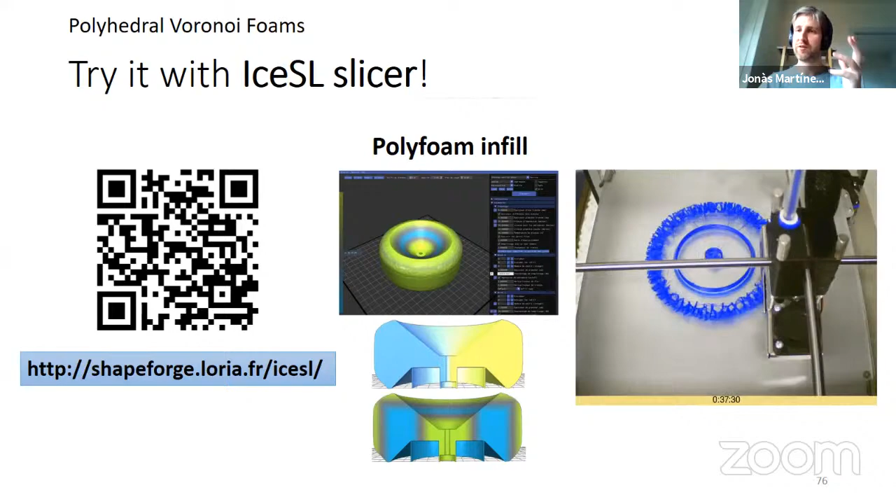So now to finalize my presentation, I'm going to switch to a different line. I talked about stochastic metamaterials. Now I'm going to show some work we did recently on periodic metamaterials for metamaterial design.

And this work revolves on an idea also of changing the metric, which is something that, as you can see, it's something that's following all the different works. Basically, we play with the properties of the metric, and then we try to get interesting metamaterials.

So in 2D, you can do periodic tilings, and you can obtain different behaviors. For instance, you can get an isotropic behavior, like the one on the left. This circle, basically, is the stiffness, so you get the same stiffness in all directions. Or you can do orthotropic materials and get these two spikes. This is a nice visualization.

Again, there's a problem because you have sometimes different classes, and you would like to transition between them. So unless you have some implicit formulation or some constraints on the boundary, this is not something that comes for free.

Oops, that was reverse. So the second one is that you want to target also some specific elastic behaviors. So for instance, imagine that you're given some specific behavior and you ask the question: what is the corresponding set of tiles that will have the same behavior?

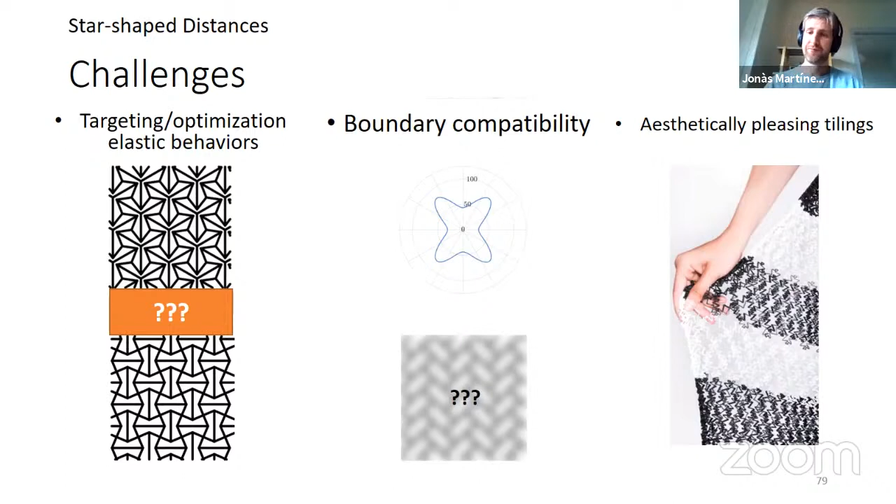And since we are in graphics, we were also interested in not only giving the designer one option, but giving them - she or he - different options that may have different aesthetics. For instance, to design tilings for garment, etc.

Regarding boundary compatibility, it's a hot topic currently. There are quite a few papers with different ways to tackle that. For instance, constraining the boundary between the tiles, or having some implicit function that blends between one and another, etc. But in all these cases, it's usually an ad hoc post-processing technique. And if it's implicit, the space is usually pretty small because it's simple implicit relations. So this is a mismatch again.

Here comes our key idea in this work. Now we consider a periodic lattice. Again, with Euclidean distance, if you take the triangular periodic lattice, you get this hexagonal Voronoi tessellation. But we thought of doing something different and changed this distance to another class of distances that we call star-shaped distances. This is a class of distances that can be compactly parameterized by a few parameters and that give interesting mechanical metamaterials. That's basically the contribution of this work. The idea is that you can compactly parameterize your mechanical metamaterial with a periodic tiling, for instance a triangular tiling or a honeycomb, and your distance.

So you see that there's already some potential. Our contributions are that we explore the space of these combinations of type of tilings and distance. We also show that since you can grade between different distances implicitly, by interpolating between distances, you implicitly interpolate the tilings too. Here you have three different star-shaped distances. The colors on the left correspond to the corresponding metamaterial. As you can see, it transitions from one class to another in a continuous fashion, and we do that in a completely implicit way. It comes from the distance, there is no post-treatment.

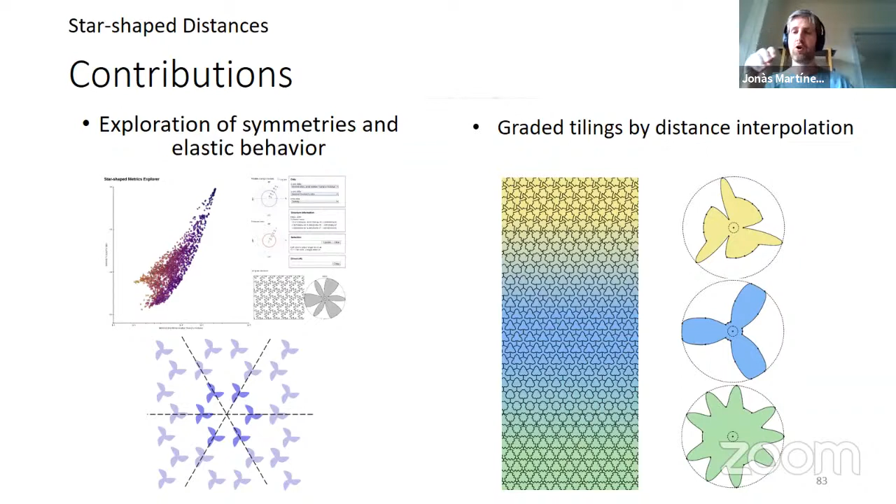So what is a star-shaped distance? We define that ourselves. Basically, let's define a compact set that is bounded with some origin in the interior, and then some minimum and maximum radial span. This is a star-shaped set as long as the line between the center and the boundary of the set is always contained in the set. So it's something close to a convex set, but more relaxed, okay.

What is nice is that you can parameterize that in polar coordinates. Basically, you have an angle and a radius, and you parameterize your star-shaped set. This is the formula - you can compute the distance basically as the Euclidean distance divided by the distance from P to the boundary. In other words, it's the scaling factor that you need to apply in the distance centered at P to touch Q. So it resembles intuitively the polygonal distance I talked about previously.

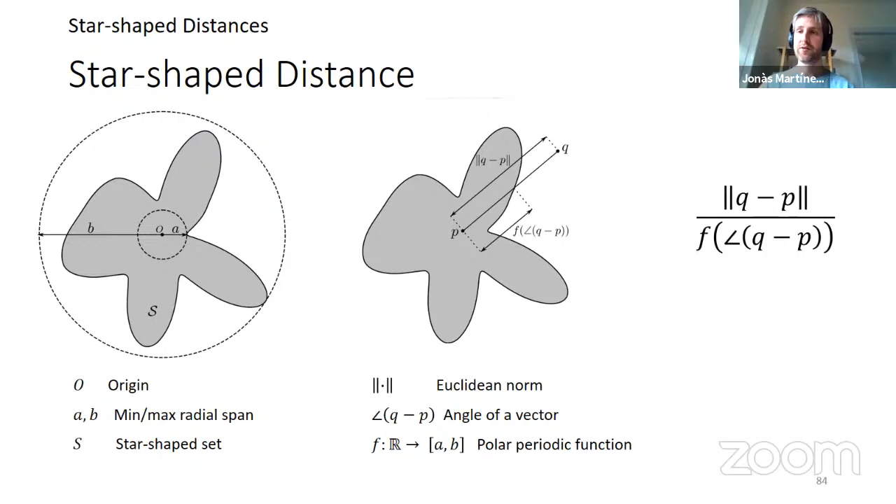So you can do parameterizations with different things. We played with polygonal and smooth outlines, where basically we define different points of this polar function, and then we do interpolation between them.

And then we stumble with the following problem. If you take the Voronoi diagram in a traditional sense under this distance, you will get Voronoi cells that are actually made of several connected components. Here you see P, it's the green region, and there is a green island in the region of Q. That's actually not good, because since we're interested in the boundary, it will lead to disconnected components of the metamaterial.

So what we did is very simple. We resort to the classical, alternative formulation of Voronoi diagrams, which is the growth model, where basically you have your star-shaped set, and then it scales in an isotropic fashion. Whenever and wherever it touches another cell, it stops scaling. So you start scaling, and then you get that. This is nice because by definition, your Voronoi cells now are a connected set by construction.

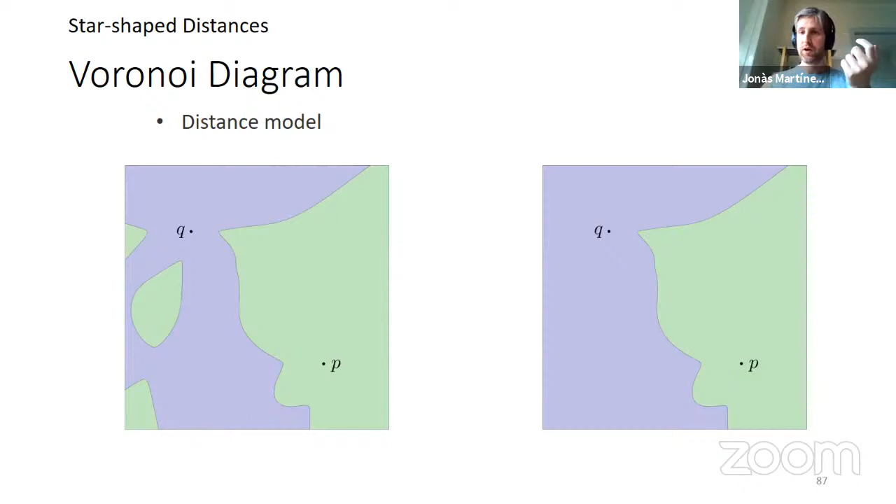Then the point lattices we consider in this work are three that are pretty standard in 2D, which are the diagonal, triangular, and honeycomb lattices. But you could use other point lattices. One of the main insights of the work is basically that if your point lattice and your distance share some symmetry - for instance, here they share a reflectional symmetry along the horizontal axis - this is going to be reflected also in the corresponding Voronoi diagram.

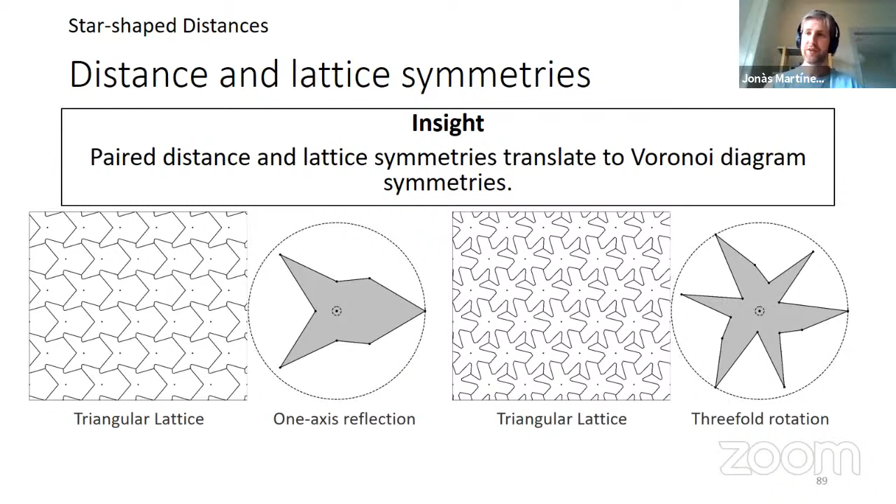And again, this is also the main point of this work. You can transition between different distances by simply changing what's the distance in one region of the space and what's the distance in another region of the space. You can do that either constantly by doing a hard transition, or for instance here, guided by some field.

And you can do it because, as you can see, when you do linear interpolation of two star-shaped sets, this leads to another star-shaped set.

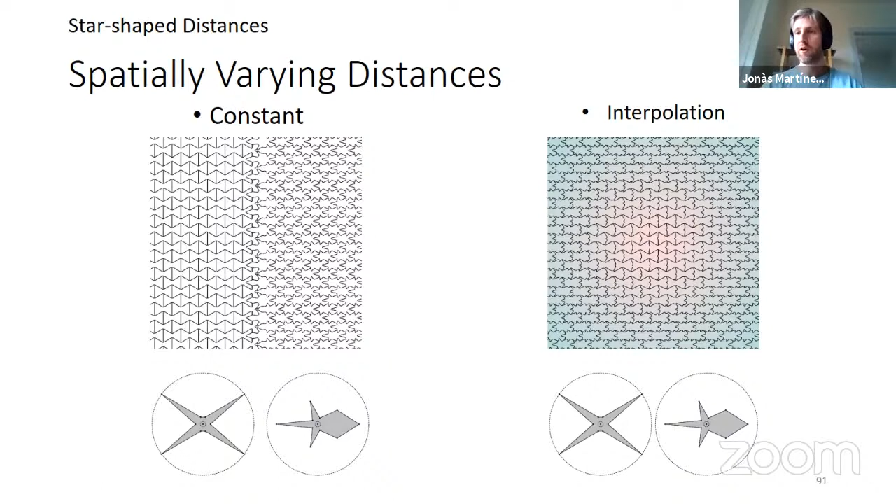So we have explored different combinations. In particular, we explored threefold rotation, which corresponds to isotropic materials, and one-axis reflection, which corresponds to orthotropic. You can download the databases from the supplemental material in the ACM library, and you will have this HTML database where you can navigate and see your structure and the corresponding distance.

We did the homogenization with publicly available code. And I think it's not shown here, but the code to compute the Voronoi networks is also completely open source, so you can replicate some of the results in the article.

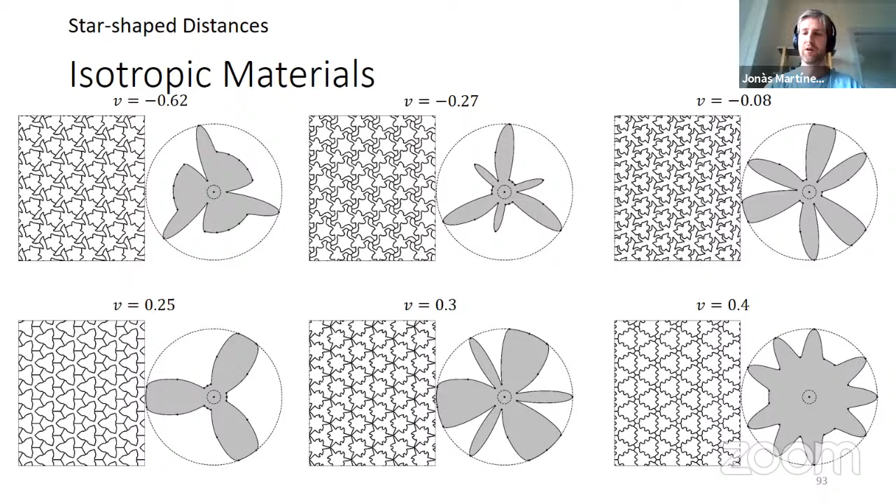Here you have a video of what's going on when you do linear interpolation, so you can see how it subtly changes from one tiling to another.

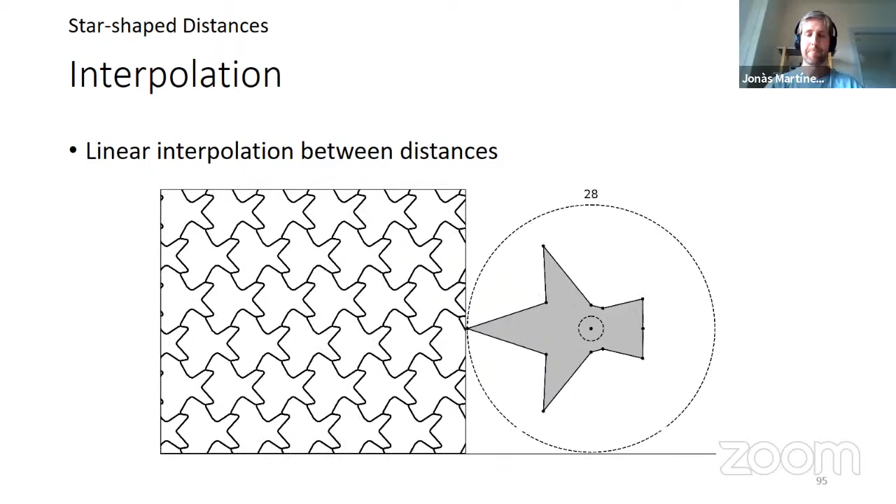However, I want to say that you can have abrupt changes. What I mean is that when you do this linear interpolation, you're not guaranteed that given a small perturbation, there won't be a discontinuous change in the Voronoi geometry. Here you see two star-shaped sets that have almost the same geometry, but with a slight change, there's abruptly a big change in the Voronoi. So that's something to study in the future.